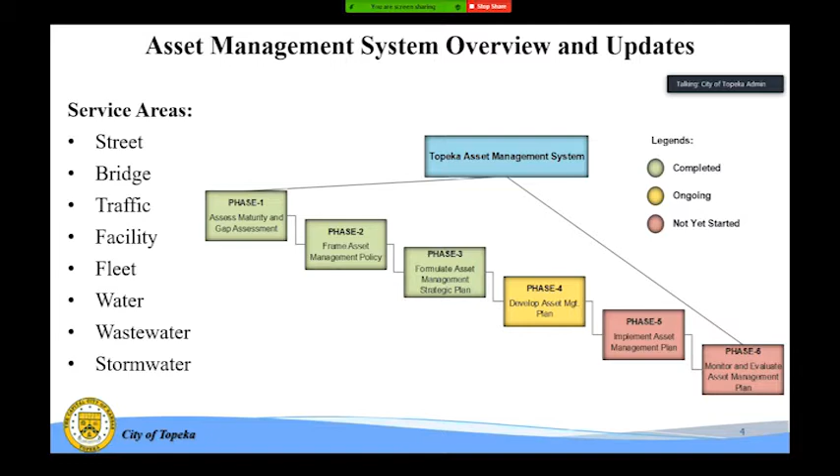Third is the asset management strategies. I will move on to the next slide and show you what I meant by that. Then toward the end, once we have done all that, we determine where our funding should come from, the financing plan for each asset. So you can see how for the next 20, 30, or even 40 years, where the gaps are and from where the funding should come to support the asset management program.

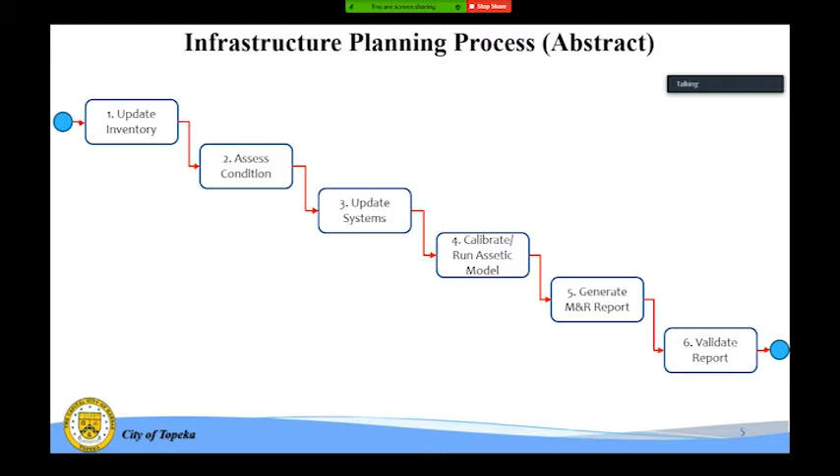This is the infrastructure planning process. On the next slide there's a more detailed one, but this is an abstract version so I can avoid the sub or minor activities. This is a generic process as part of our SOP I've developed for infrastructure planning, with abstract steps for how we should be doing our planning across the organization for all types of assets.

Over here the focus is slightly on the street. The first step is to update our inventory after completing all our capital projects - how this process is done, and SOPs developed for that first step. Then is asset condition: how to do the condition assessment, when to do it, the frequencies, and all the rating criteria developed for this.

The third step is system updates. We have a lot of different systems including GIS and Cityworks, so all those systems get updated. Then in the fourth step we brought in the Assetic model for infrastructure planning - this is our way of moving forward in developing the program. So in the fourth step we are running that model.

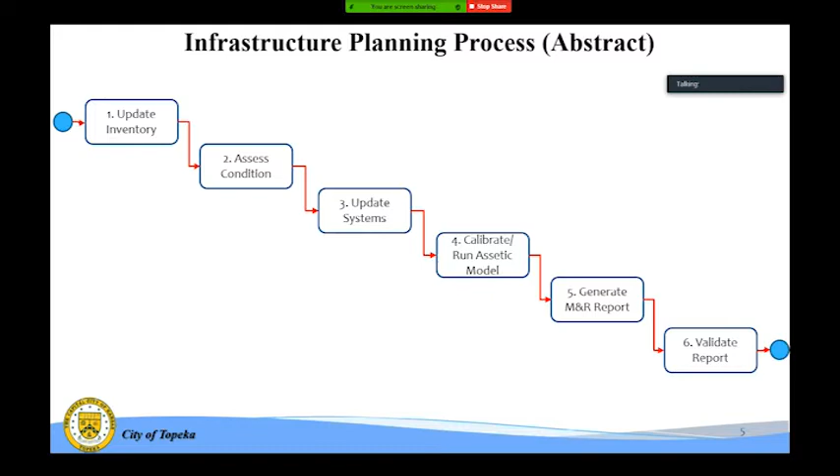Then we are generating the maintenance and rehabilitation report, which includes reconstruction projects as well. Once the report is generated, we validate it to see how computer decisions and field decisions relate to each other.

So this is the same process, and based on this is our SOP for the infrastructure planning process. The same is implemented with slight modification for the utilities, but we use almost the same process.

On the first slide, the abstract slide, we have developed the maintenance and rehabilitation program. Now we have other capacity-related or growth-related projects, which we identify as part of the infrastructure plans. Once we include the capacity-based, growth-based, and maintenance and rehabilitation-based projects, we consult with the street department if they have requests in the CityWorks. They ask and request the city engineer, and we include those projects. At this point, our capital improvement program is very comprehensive.

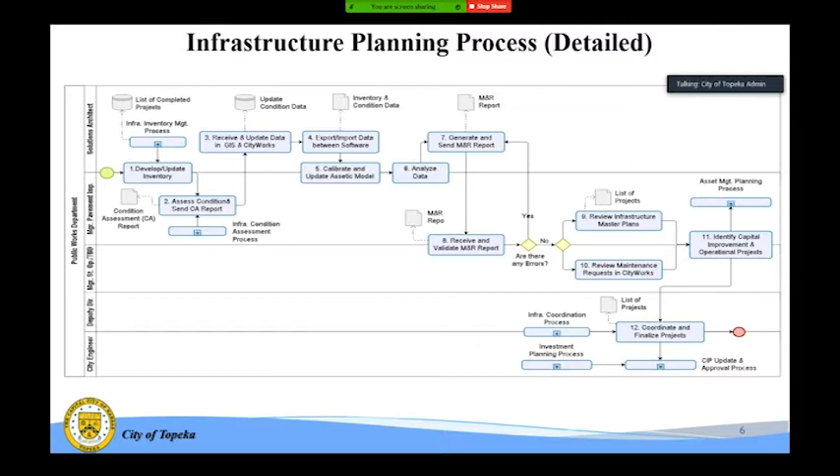This is something regarding infrastructure planning and the asset management program. As part of that, we are doing condition assessments as part of our pavement management program on a 3-year cycle, so the whole condition of all streets is assessed throughout the city for all different types of streets.

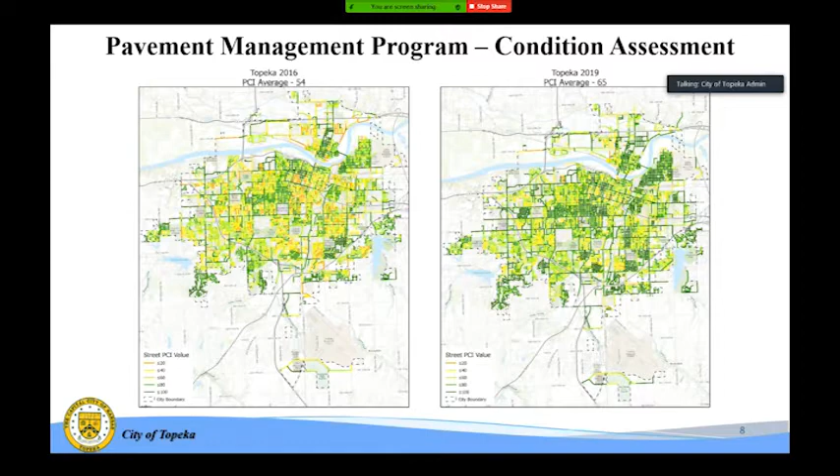On a 3-year cycle, on the left side is our 2016 data, and on the right side we have the PCI value for the 19 data. The PCI increased from 54 to 65%. On the left side you see a lot of orange and yellow color, with yellow being fair and orange being poor. On the other side you see a lot of green and dark green, where greens are good and dark greens are excellent or very good.

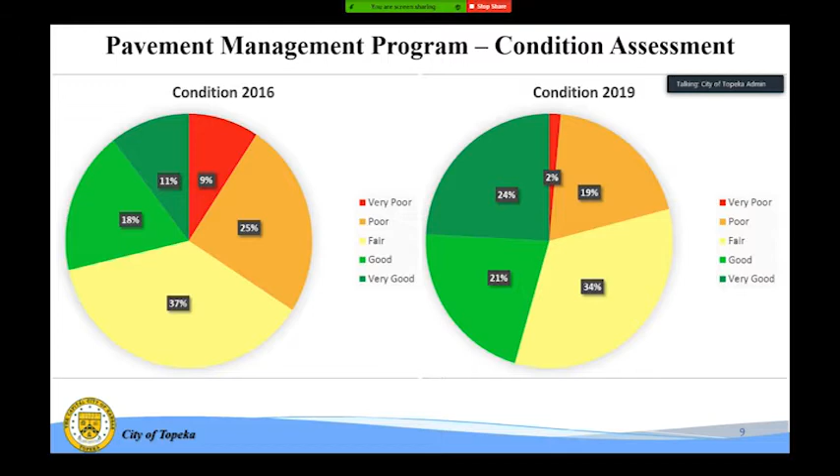Another comparison is the percentage-wise comparison between 2016 and 19. We have reduced the very poor and poor, and increased the greens from 18 and 11% to 21 and 24%. I think we are progressing in the right direction.

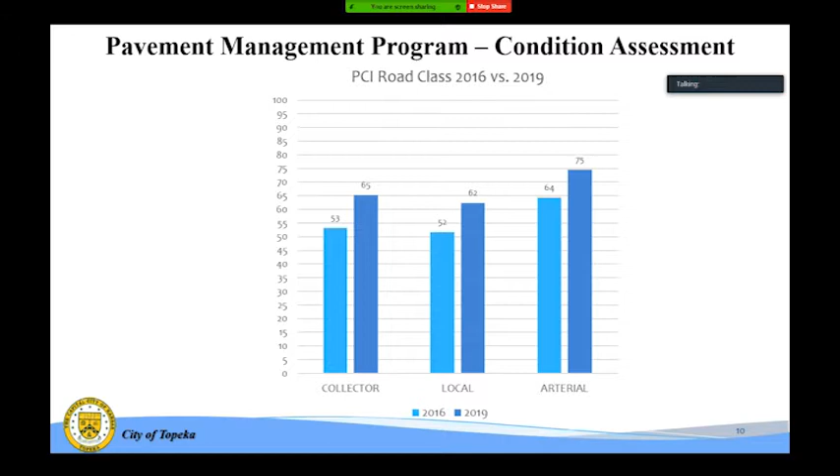This is another comparison where we compared asphalt concrete and concrete PCC pavements for local, collectors, and arterials. If you compare 16 and 19 for both road classes and surface types, you can see an improvement from 2016.

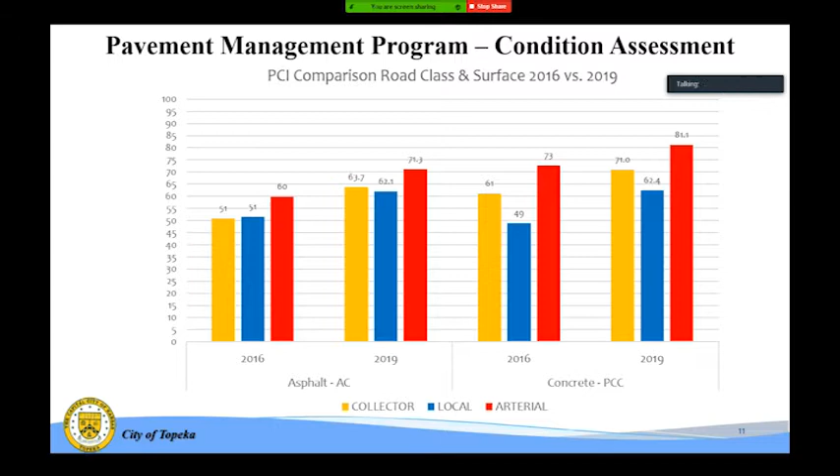The existing approach for street selection is that once we get the PCI values, we create a map, like the one you just saw, and then based on those ranges, the city engineer along with his team manually picks the treatment. When it's above 86%, we are not doing anything. When it ranges from 56 to 85%, we are doing preventive maintenance treatments. Once it's between 20 and 55%, we are doing rehabilitation, and when it's 20 or below, we have reconstruction. So the condition maps are developed and manually everything is picked.

Once the program is done, it is shared with the street operations department, and if they have inputs or projects to identify, they give the request to the city engineer. They then have a very good work program for the next 1, 2, or 3 years.

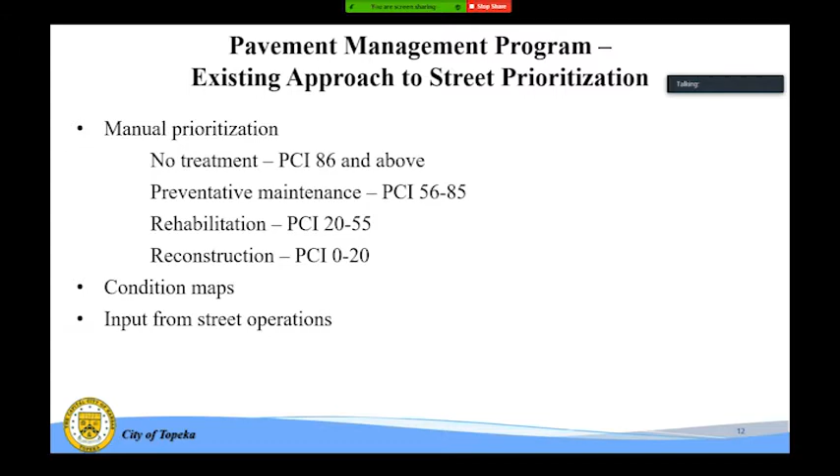The moving forward approach is that from this year, the 2019 data is already there. We are validating that, and once done, we will upload this to the Assetic model, and the decisions for the streets, the service criteria, the second one. So the decisions will still be made based on the pavement condition index. We have data collected for pavement roughness index, but most probably we will use this once our model is refined for high volume roads, and we are looking forward to using their data for our arterials.

Our treatment trigger criteria determine when different types of treatments are to be applied. In the next slide I have an example for that, but we are using 2 criteria right now: one is the road class and the surface type. For road class, we are considering 3: local, arterial, and collectors. For surface type, we have 3 types: brick pavement, concrete, and asphalt concrete.

Once those service criteria and triggers are defined in the Assetic model, we run the scenario analysis. One scenario is, for instance, the council asks us, okay, this is your budget, $24 million, so what best can we do within that $24 million? This scenario analysis is done, and as a result the capital program will be developed, giving us a lot of other information, but 3 things are important.

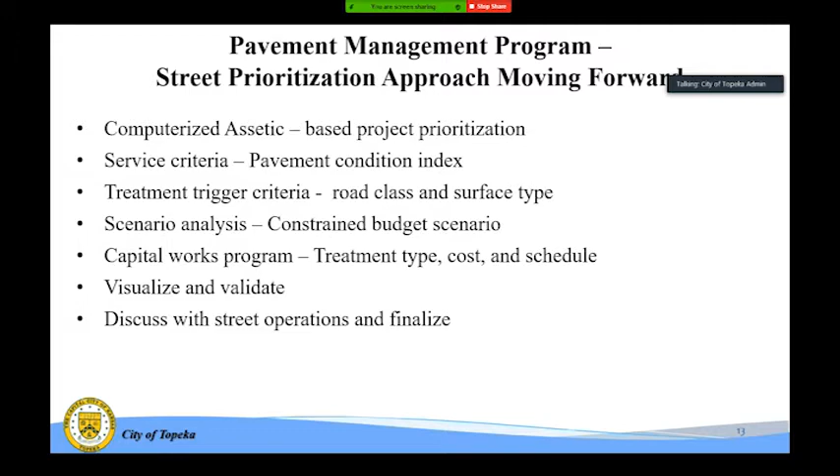In the last slide are the decisions, how the decisions are made. So this is the one developed for the local streets. Same is developed for arterials and collectors on asphalt. Three of those curves are developed: for asphalt, for PCC, and for brick pavement, and the same will be uploaded to the Assetic model for decision making.

So first, when the road is newly constructed, the PCI value is 100. When it degrades to 70, the first treatment comes in and takes the PCI back to 85. It degrades with the passage of time to 55, and then surface seal and patch is the second treatment. It takes it up to 70, and once the PCI gets to 30, at this stage we do the mill and overlay, and it bumps it up to 90 again. This whole cycle will go again until the end when the PCI value is 10.

So the second time those treatments are done, then we reconstruct the road once again, and the whole cycle goes on.

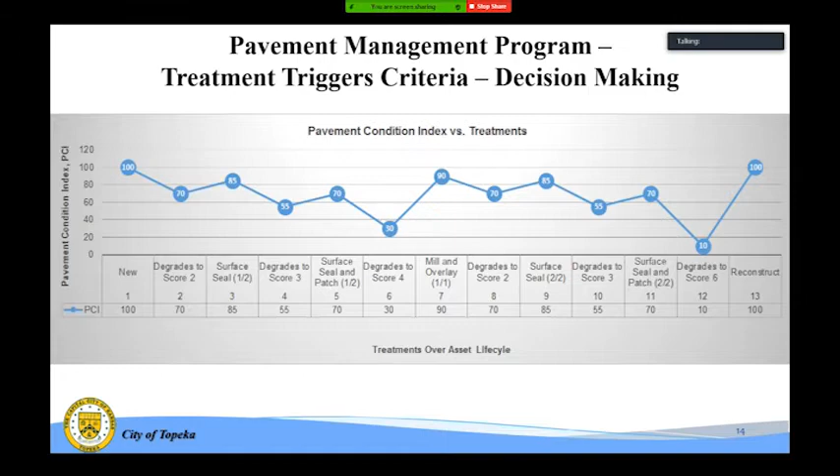Question: what's the time frame you're looking for from 100 to reconstruct? This is different for different roads. So for locals, we are looking for up to 50 years. Then for the collectors it's a different life cycle, and the life cycle changes for concrete and for asphalt, and then within the road class it's different for different types.

So this was the last slide, and if you have any questions.

All right, appreciate that presentation. Questions? I've got a couple.

Go ahead. I'm interested, I understand this was focused on pavement. That's good, and we know the funding source is fairly stable for the next 10 years maybe. I'm interested in how that interacts. So maybe take facilities and fleet and even the plants out of the question right now. Between streets and the distribution system, the collection system for both water and wastewater, how are we integrating that all together? So we understand what the assets look like on the utility side, and replacement schedules for those assets match up as much as possible with the street side of it.

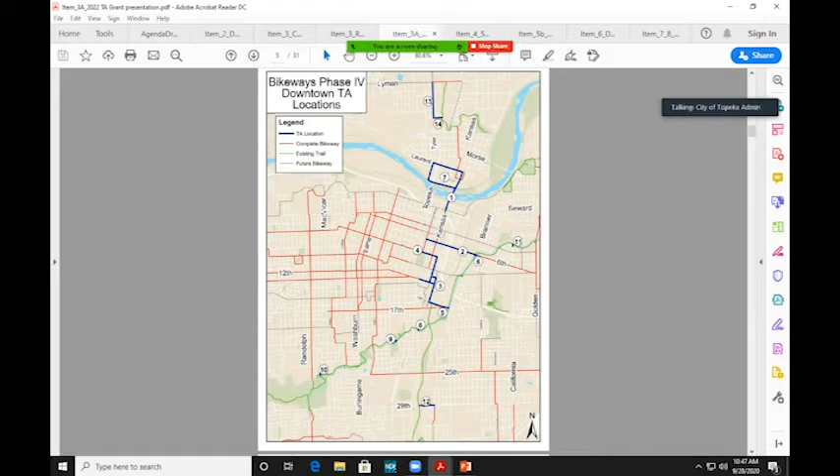The third project in this overall application would be for Northwest Tyler. There's a current street project, that's project 13 and 14 at the top, already approved in the CIP and in design. This would ask for the part for sidewalks and a 10-foot wide multi-use path between Waddell and Lyman, and also a 10-foot multi-use path connection to the Soldier Creek Trail over some land the city owns. We were successful last cycle getting a multi-use path bridge for our 10th Street project just east of Wanamaker. We feel like this one has a little bigger scope, but still has a good chance this time around.

So all told, if you put all those projects together, we have about a $2 million project, of which we would ask $1.6 million from KDOT for the grant. The city would end up matching a little over $400,000 for those. I don't believe we get any more credit if we put in more than 20% - sometimes we get asked if we could put more into it, and the answer is we don't get any credit. We could, but we don't, since it doesn't help our chance to get the grant.

So with that, typically we come back to the council for a resolution of support for these things. These are our major asks for grants every couple of years, so it helps the grant to show that support and alignment with our plans. That's what's before you. We thought we'd bring this to the committee before it goes to the council for any comments.